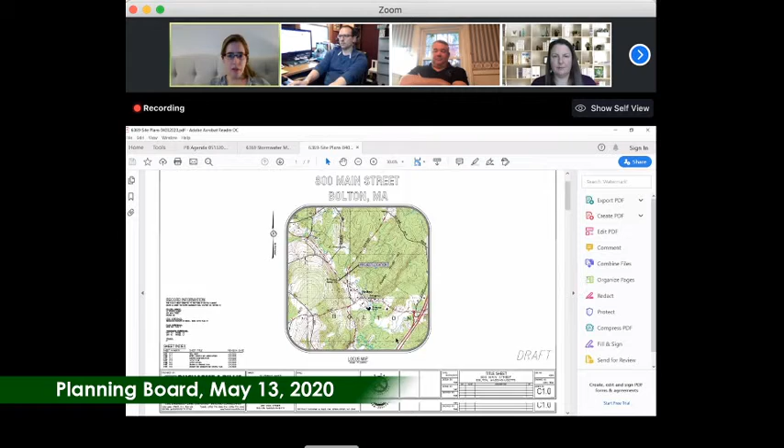So here's the existing condition sheet. This is that Stevenson's property that they purchased. And here is the layout that they're proposing for their driveway or parking lot expansion. So this is the church, this is that garage we were looking at. I believe this is that existing curb cut that's the furthest south.

Here's the expansion here. This is a two-way traffic flow pattern. Parishioners that are coming in can also park in front of the church. They have some handicap parking spaces here. It's a one-way.

Here's another view of that area extended. So here's the one-way. They can come down, they can continue to park, and then they can pull out from the curb cut that's furthest north.

So are they gonna keep the... are they gonna get away with this? Give the second curb cut?

It's funny, I put together some draft comments for the board to help facilitate discussion, and that's exactly a question I had. I think it would be preferred to get rid of that middle curb cut if it's not needed. I mean, I think it's just confusing for traffic goers. And that's, I guess, a question for Dan, if that's something they've thought about.

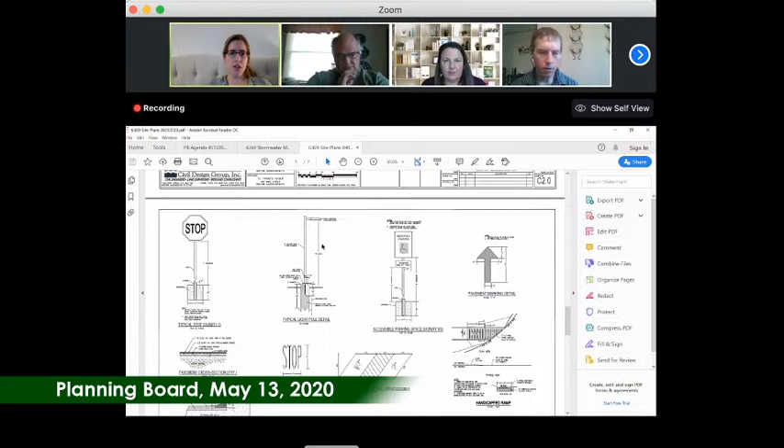I'll just continue through real quick through the site plans. Here are the details for some signage, the light pole detail, the handicap parking details, cross section of the pavement that they're proposing. They're using the bituminous concrete curb.

They don't have to comply with Mass DEP standards, but Ducharme and Dillis has designed a system that has done quite a bit. I think it meets about 89% TSS removal, and it completely infiltrates post-development runoff from that impervious area.

So I guess they're just using catch basins as pre-treatment? They also have an isolator row that they've identified in their stormwater write-up. So I'm assuming that isolator row must have a filter fabric around it or something. Yes, all right, that's great.

Okay, good. Yep, and then they've also provided here sort of an erosion control plan to be used during construction. So they're providing silt fence and straw bales and protection at the existing basins.

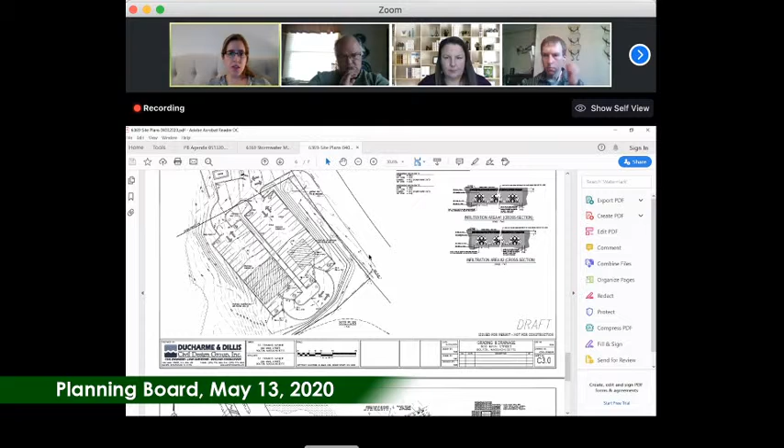Quick question, I see they're providing 44% because it's an infiltration system. Do we know where groundwater is? Do they do soil testing? They did do soil testing, we can go back to the plans. It looks like they did a bunch of test pits. The design of the system provides the 2-foot separation needed to the estimated seasonal high groundwater.

So they have 2 feet of separation. The only other thing I'd want to check is in their HydroCAD calcs, did they use an exfiltration rate or not? Or is it just 2 feet, or do we have even more than 4 feet of separation? I believe it's 2 feet. Yeah, it's exactly 2 feet, and I think they're raised.

I mean, the parking lot area, I looked at the grading relatively quickly, but it looks like they're raising it up. You can see here the grading goes up, and I think I was looking in this area. It was about a 5-foot difference here.

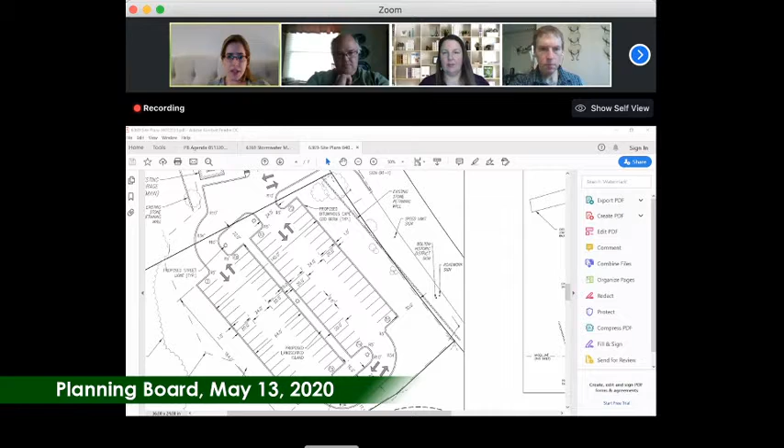So let me pull up my comments that I started to put together. Now, you guys can still see the site plans, correct? Yep. Okay, so let me zoom out a little to make that clearer.

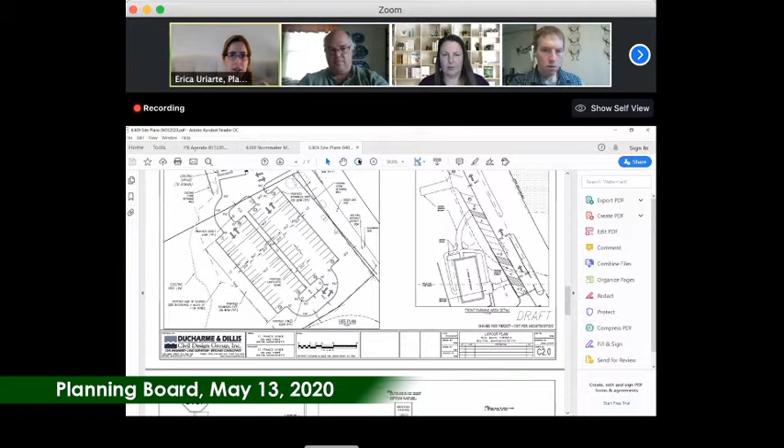As far as comments go, I thought this is sort of a general comment that we've done in the past for other church expanded uses, where I note that religious uses are an exempt use in accordance with the Dover Amendment under Chapter 40A, Section 3 of Mass General Law. Thus, the applicant is subject to reasonable regulation only as applied to the parking lot expansion improvement project. So that's just putting it out there that we understand you're an exempt use, but we can still apply some reasonable regulation to this project.

And then I go on and have several comments relating to the layout. The first one is I just note, and feel free at any point to disagree with me, that the proposed project improves parking and the overall traffic flow of the site. I think that's pretty much undeniable considering what it is right now.

The next comment is that the applicant should verify which of the existing bollards are to be removed from the project site. Currently there are bollards placed at each of the 3 curb cut openings along the project site. I think it would be helpful to understand if, I assume those bollards must be being removed, but it's not clear from the plan. So that was a comment.

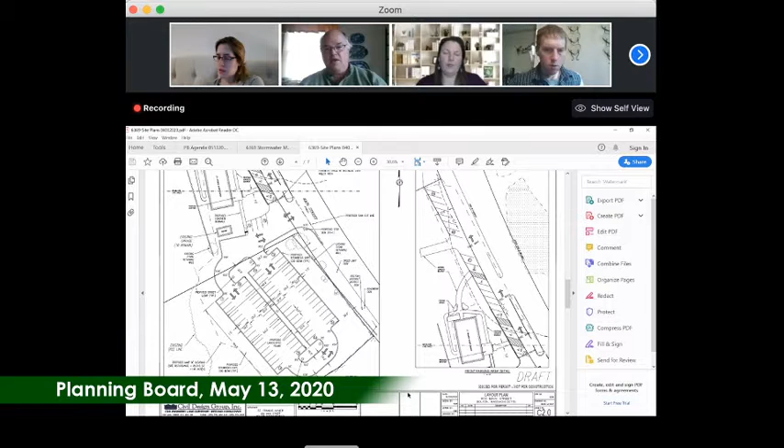Yeah, that would be the case on the far point, but not on the easternmost. Correct, yeah, it would be the westernmost or northernmost, depending on... I guess technically it's northernmost, the one that's in front of the rectory.

Do we lose you, Erica? Oh, looks like she might be frozen. She's frozen, yeah.

Dan, a question I had was, as people leave, is the expectation that people will use the eastmost exit and turn right, then drive down the driveway and turn left at the western side? No, it's an interesting thought, though. I hadn't really thought about it from a flow perspective. We just had roughly two exits from each side. We haven't put a right-turn-only kind of approach.

Yeah, it's an interesting question. I imagine it bottlenecks pretty bad there when everyone's trying to get out of that one lane if they have to make a left. Right, exactly. I don't think it's pertinent to... No, I just think it's a good question. It may come down to that. It may simplify the speed at which we can exit there if we had one that went one way and one that went the other way.

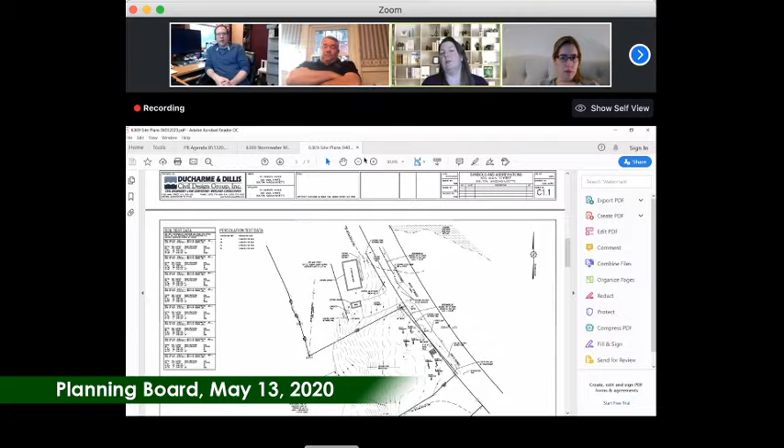I mean, I know you're not supposed to use a perk rate for your hydraulic rate, but if they did a test pit or something, they could include a test pit log of the soils. They could dispute the NRCS classification of it being a C soil, but they'd need to include that soils information, basically stating 'look, we've got on-site soils information that says it's this, and we feel the exfiltration rate more accurately represents a B soil' and use that. But right now, looking at what they provided, there's none of that information.

Okay, so they didn't provide soil data? At least I don't see that on the plan.

I don't know if this would be sufficient information for you to be able to determine. Can you see that? There's a whole protocol for what they need to do if they want to dispute.

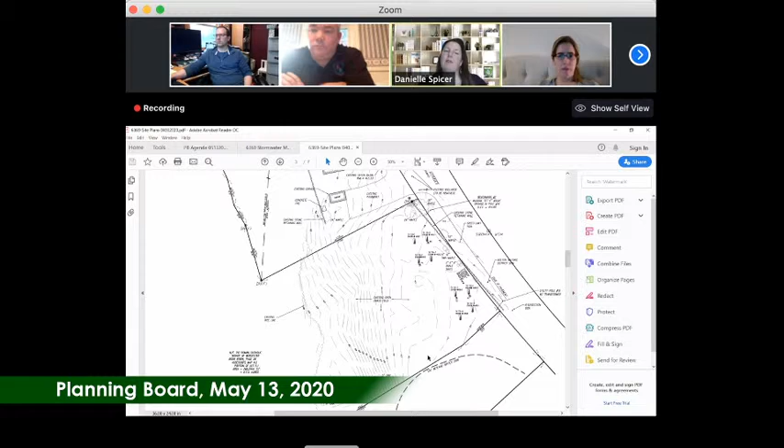Yeah, I don't know if that is enough. I want to go back and review the requirements for when you want to dispute it. I think you need some more geotechnical information included when you don't use the Rawls rate that it is associated with.

So what I'll do is provide that as a comment, and they can come back with the necessary information. I think they could do either: they could change the rate they use in the HydroCAD to match the C and not need to do anything additional soil-wise, or they need to provide additional information on the soils to back up why they're able to use a B Rawls rate.

And then I would also add the comment about the mounding. It doesn't matter whether it's A, B, C, or D—the fact that they are using an exfiltration rate in their calculations and they have exactly 2 feet of separation means they just need to do a mounding analysis to show the separation.

I can see there's already been some work done to the site. Dave, could you elaborate on that? What's been done in terms of tree clearing and site testing? Yeah, the site was just mowed this winter when we purchased it, just so we could show the parishioners the size of what was there. It was strictly mowing, and the soil testing had been done previous to us purchasing it.

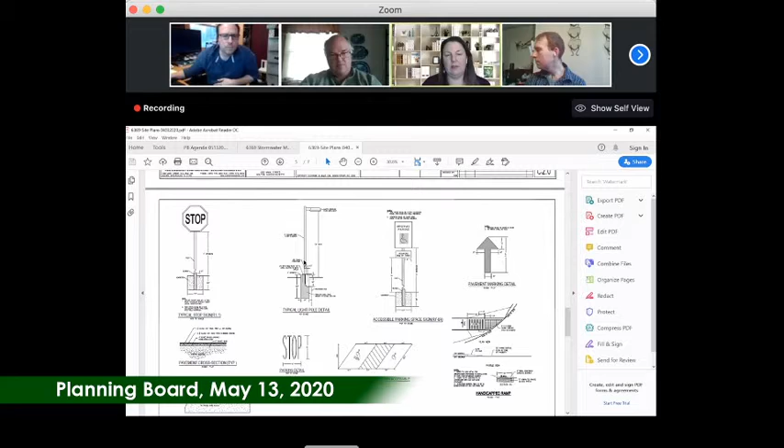And the only other thing I would add is, I'm looking at the grading plan. You want to go to that one. It looks like it's a pretty steep slope between the edge of the parking and as you go towards Route 117. So a proposed guardrail, or?

It's not steep at all. It's going to be completely, I don't know what he's got there for. Because it looks like it's going from 418 down to 412, so you've got a 6-foot drop.

Because right in the middle of that parking is a 418 contour, and then the bottom contour that's right next to, I guess, still within the property line is around 412. So considering that there's no bench, one of two things could happen: they could provide maybe a 3-foot wide grass area so it's flat and then it drops down, and maybe you don't need to worry about a guardrail.

But I would just have them look at that area, and then the turn, the radius turn. It looks like the grades there also get pretty steep. I think it's less, like 414 down to 410, so it looks like it's more of a 4-foot drop. But it's pretty small run, so it's a fairly steep.

Usually when you have a slope right next to the curb immediately dropping, you need some sort of fall protection like a guardrail. If they could redesign it so you have a flat bench and then drop down, I think you could avoid having a guardrail. I need to look at that - thanks for pointing that out, I want to take a hard look at it.

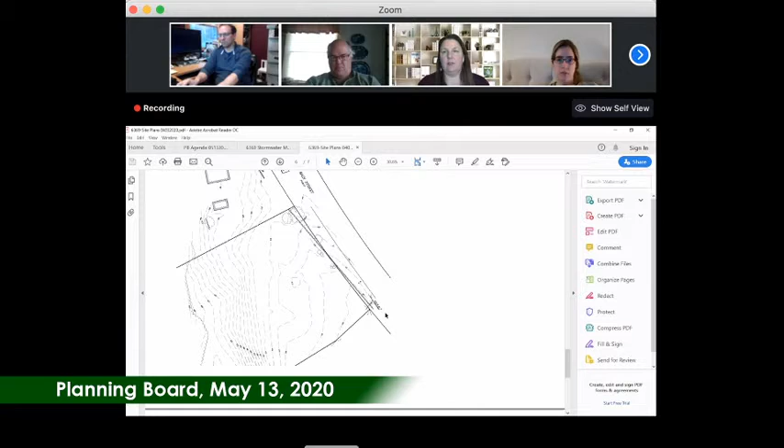So I believe that they're highly functional. I just don't know if it's a catch basin or if it goes somewhere.

Okay, so I guess our comment would just be to see if we could get some additional information on where those go. At the end of the day, it's not drainage that impacts the drainage system for the expansion area, but it would be nice to understand where the existing runoff is going for that area.

And then the other comment—if it ends up going to a wetland system, it's about taking extra care during construction so that sediment isn't getting into those basins and impacting areas downstream. That was sort of where I was leading with that.

And that's basically it. Then I have a summary at the end saying the board favors the parking lot expansion improvement project at St. Francis Xavier Church, as it will improve existing conditions and enhance the safety of patrons traveling back and forth from the parking lot to the church. The board recommends approving the site plan. So that's kind of what I have now for a draft.

Is the board in disagreement with anything we've gone through that I generated for draft comments? No, I think it captures everything plus what we would have done anyway.

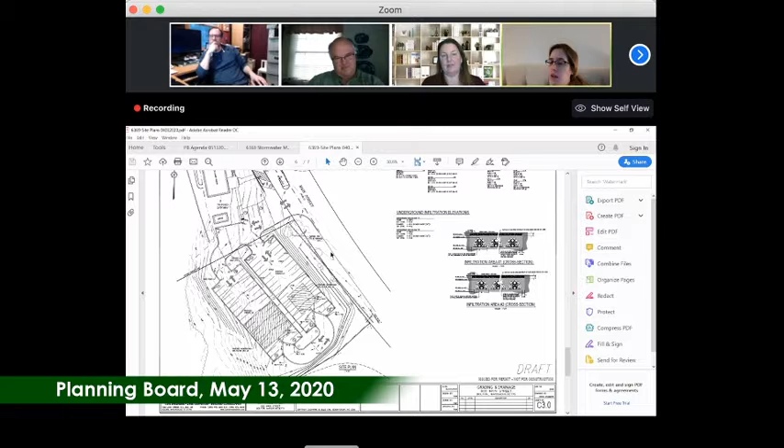All right, but thanks for the comments on the design. I'm going back to Ducharme, so it wouldn't surprise me if I come back here to you guys again once we've made the changes to the plan. So Dan, what I'll do is draft this letter up, have the board review it, and then send this final comment letter to Jenny for the Board of Selectmen. Then, if your drainage system design changes before you meet with the Board of Selectmen, just let me know and we can do this again and I can modify the letter. Okay, fantastic, excellent.

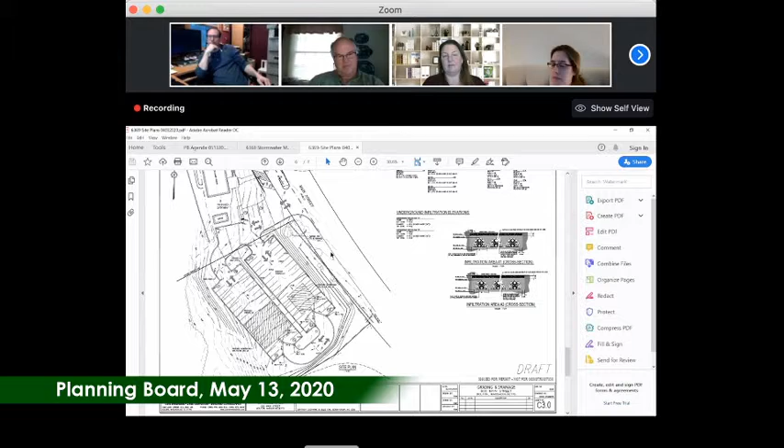All right, we all set? Good. So next - I think it's just administrative items. I'm going to bail out, thanks guys for everything, appreciate it. Thank you, bye Dan. Bye, good night now, have a good night. Good night.